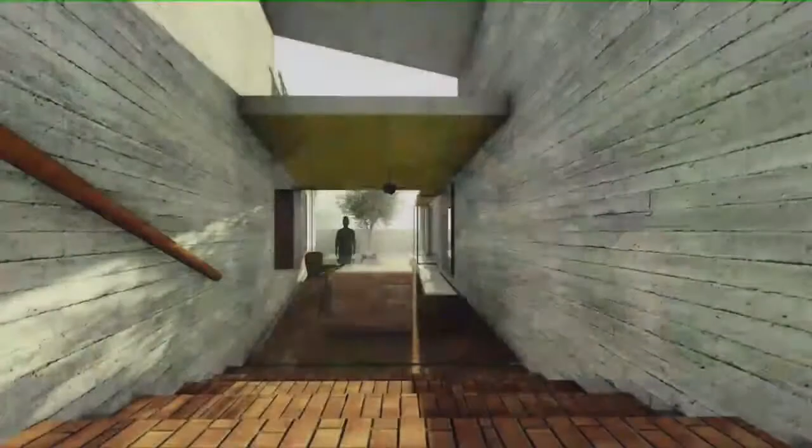So this is sort of what we do as well. So as a practice, it's a set of 20 people who are extremely passionate, deeply mad about what we do. And over the last 10 years of our practice, we've been fortunate enough to work on multiple things, juggle a lot of things, and ultimately find a way to put these all together in a way which starts looking like it's pretty balanced. But the kind of journey that goes behind it is crazy, it's mad. A highly passionate set of people, fully into what we do.

I'm going to run you all through 4 projects that sort of talk about different perspectives, different contexts, different scales as well. Starting from the smallest project, and like we know, each project or each studio, each setting that you live in has a story. So four different stories, if I can put it together in that sense.

This was one of our smallest projects that we started off with a couple of years ago, where the client actually came down from Saudi and said he wanted to come back to Mangalore, which is in the coastal part of Karnataka, and had a lot of memory with his upbringing there, with the brick factories and the area where he lived in. So although he could afford a larger place, he was extremely keen that we look at a place which is very, very close to where he used to live.

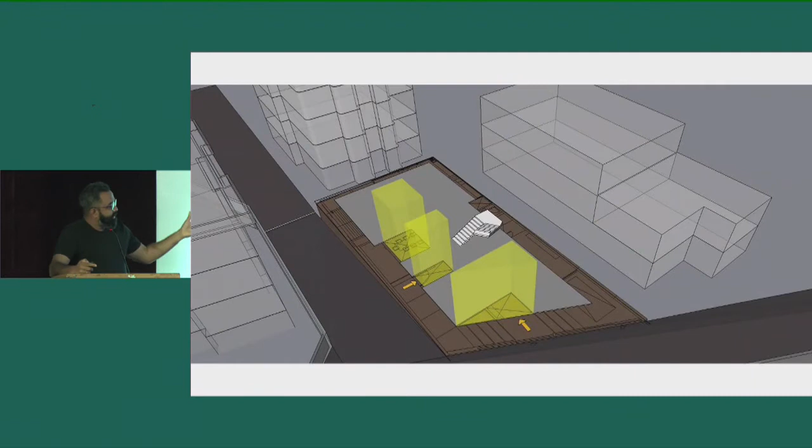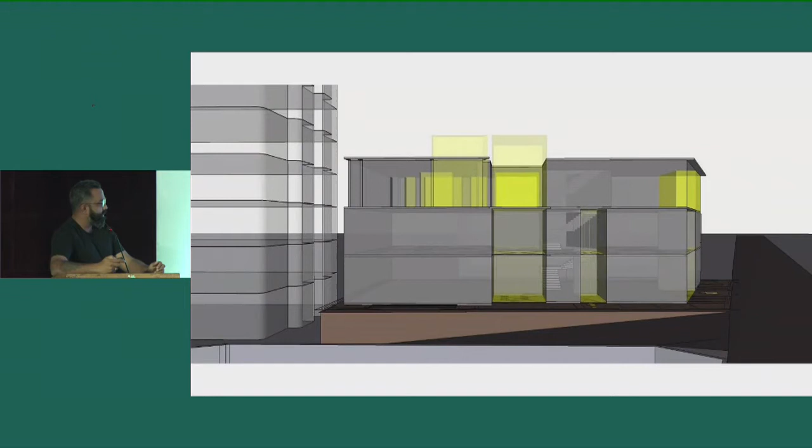So the entire setting was done in such a way that you had multiple things all around. So all that you could look at is find ways to open up to the sky and connect to the earth at different levels. So tight-knit site, concealed from all the sides except where you open only to the sky. The rest of the things that start coming together is this sort of a skin that comes out, which actually started building the story. So when you have a setting with multiple things happening around, and the only thing available is the outer side where you could look out, but then it also starts to appear that other people are looking inwards, then you start finding ways to tackle that. So that's where the whole idea of these bricks started coming in.

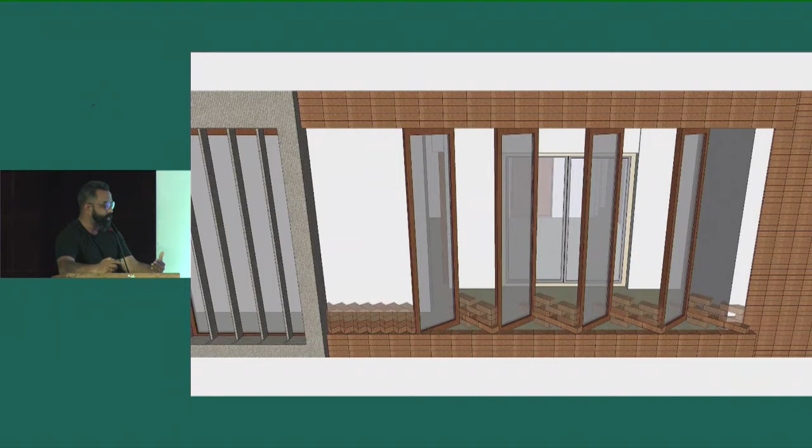So when you start looking at a process, we sort of build it through this initial foray of initial imagery that we start off with, which then started getting into detail, where every layer, every area started finding its own way, and every brick started telling its own story. So the kind of layering that was required for this project started finding its own way, and there were multiple hands collaborating together to find its own aspect onto the kind of direction and the kind of views that you would want to have, sometimes conceal, sometimes reveal, sometimes just work as a veil. So this was a project which actually allowed us to explore bricks in a 3-layered format.

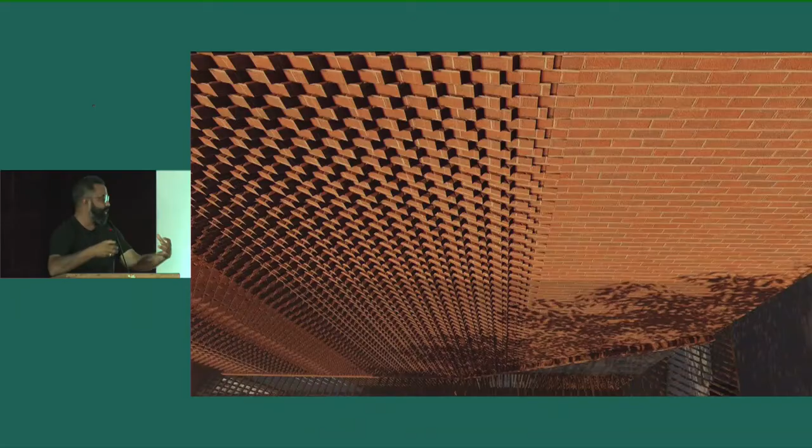Laterite being the first layer, which became the source of the whole structure. Then you had bricks on the outer periphery, which started working around the kind of layering that was required, and the inner brick started doing its own thing. So each brick actually started finding its own way, started having its own story. And this was the first set of workings that we did, running you all through a few of the images and the kind of connect that you would have with the sky.

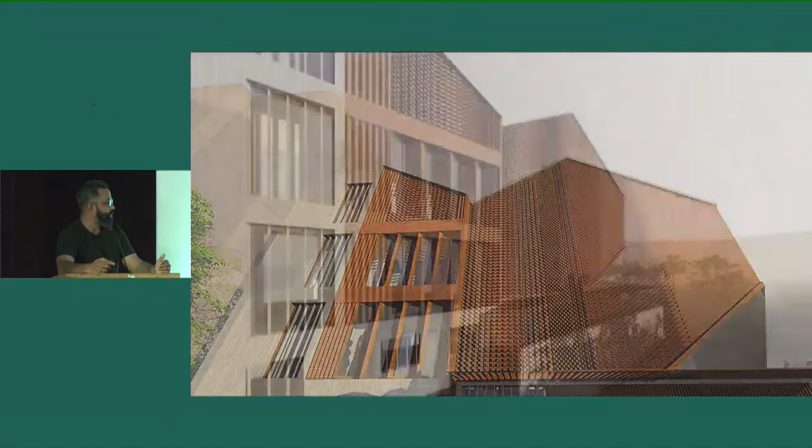The kind of layering also made it important for us to understand the kind of lifestyle that the client had. So the client would actually come down to Mangalore twice a year, thrice a year. So other times of the year, the house had to sort of conceal itself. So this whole idea of the bricks starting to play around had to sort of address those two issues where you don't know whether the client is at home or not. So that kind of a situation.

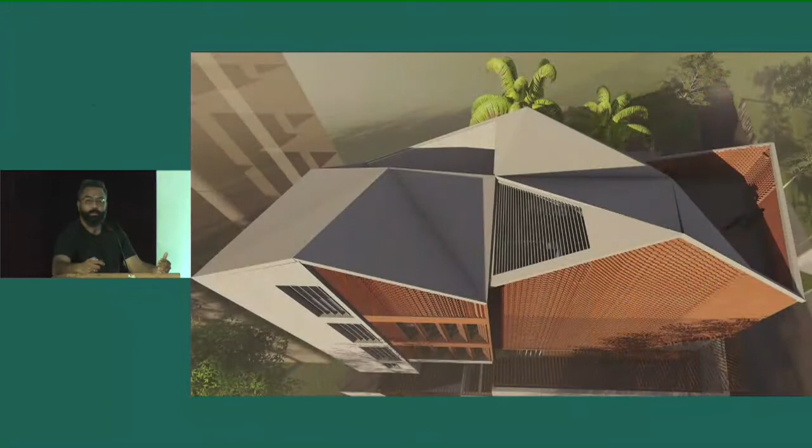So when you start looking at the way the brick started forming its own patterns and its own typologies, we started finding multiple ways to put these together. One of the things that we do as a part of our process is hand modeling, which has been around in our studio from the day we started, and a lot of the explorations happen on this scale, although I think we know who's here, who's explored brick and other materials to its finest potential. For us, being in Bangalore, we have our limitations with resources in a way where you can't do mock-ups, etc., being in another city, etc.

So everything that we do is hand-modeled in the studio, multiple people working on it, lesser time, too much pressure, but we don't give up on this. So this was one of the times when I think we put in 15-20 days of massive man hours to sort of put together every single layer of the brick and sort of start finding ways to build it, and also start finding ways to foresee any problems that you would have.

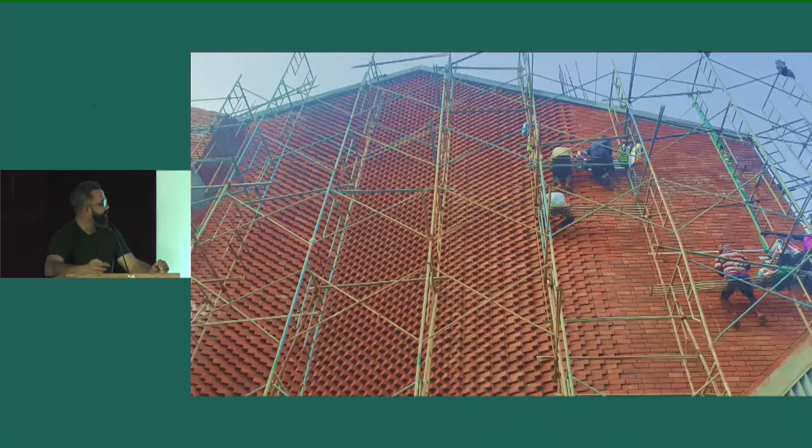Then it went on to the next level where we started rendering them to sort of understand the kind of feel that would come out of it. And all that you see was all done in first cut, and this is how we actually present to the clients as well. So what you see is exactly what we put across to the client, and then the whole experimentation started happening on site. The entire project in fact doesn't have any paint inside out. Everything was done in brick, plastered finishes, concrete textures, and whatnot.

The scale, although was not very large, but the kind of expertise that was required was also sort of worked out with the local guys there. We didn't have a special team that would come down from somewhere else. So those guys had to be trained. We had to work with them inside out to understand the kind of layering that each brick had to go through. Each brick actually started looking into different directions. Everything was done in multiple ways to sort of understand how it would react. So that's the first project where the layerings were done in multiple variations, from modeling to computer modeling to hand model to site, etc.

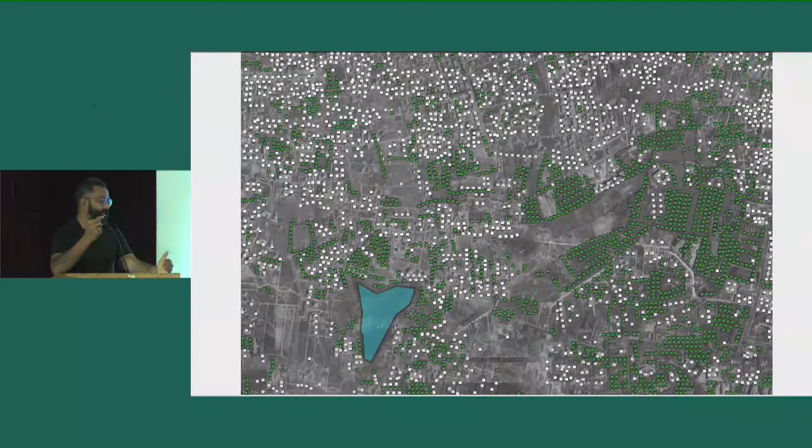The next project is something that's actually close to my heart. Vanam was a sort of a builder-driven project. In Bangalore, when we are doing multiple projects, you sort of stray away from projects where it is developer-driven or builder-driven for multiple reasons. But we realized that the kind of potential that the city has would start losing its charm if you start looking at only projects that you really want to do and start shying away from these projects which are sort of not something that you would want to get into on a regular basis.

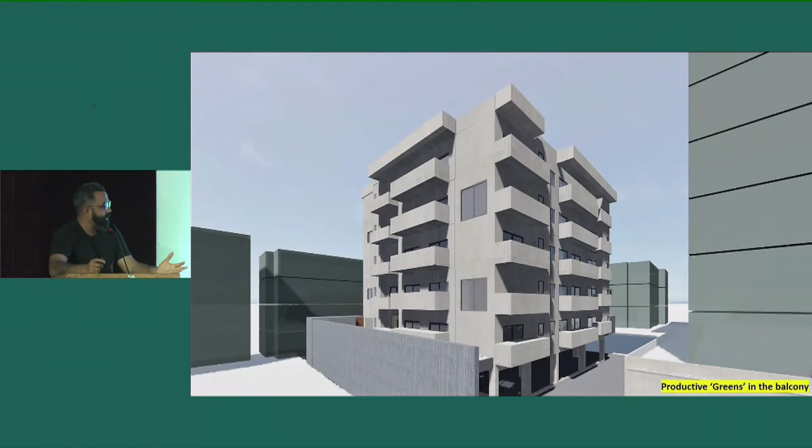The kind of context that this project had also allowed us to see how much of the greens had actually reduced, and the reduction in the size of the lake is also quite evident in the last 10-15 years. So we took this up as a challenge and said, what happens if we start looking at the small housing which is for only 20 units and see if there can be more greens grown as a part of the built form rather than just the building being built and the greens on the outer periphery. Because most of the projects that you get in Bangalore are actually quite tight in terms of the smaller context. Larger context, of course, you have a lot of green space that you could play with.

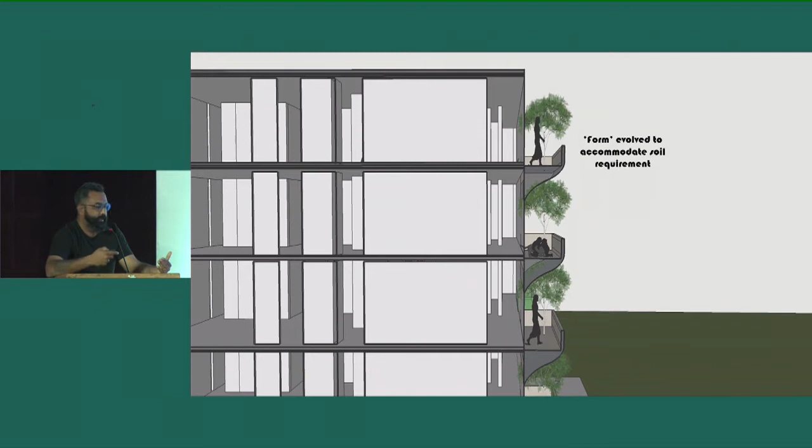So the process involved in this was to understand how the greens can become a part of the built form itself. So instead of looking at normal balconies that would allow you to move out, we said, why don't we start staggering it and start finding ways for the soil to become a part of it, so that the greens become a part of the built form itself, and then it starts forming its own layers. So that's how the whole form started evolving out of it, which eventually also found ways to find productive greens that can become a part of it.

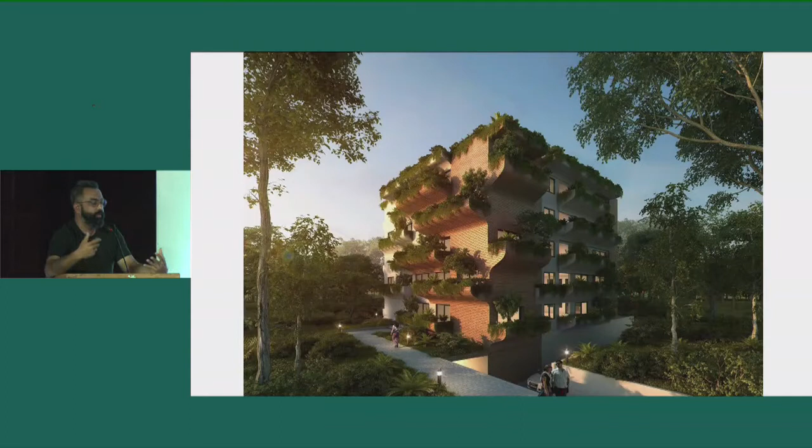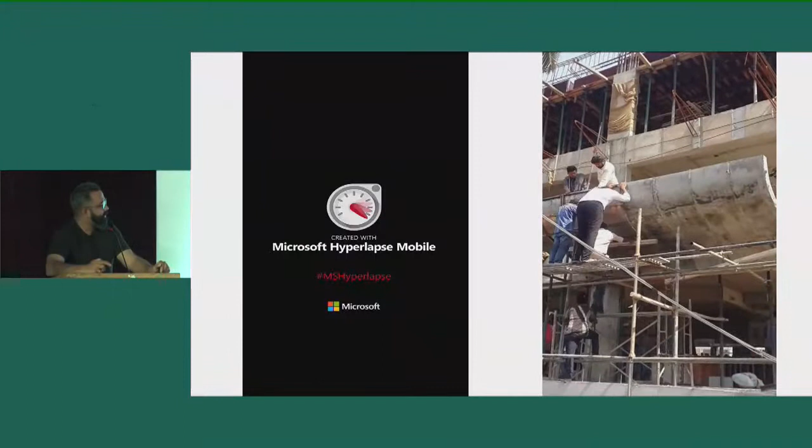We also did a lot of calculations to understand the kind of greens that every family would require and allow people with similar mindsets to come down and be a part of it. It was also an experiment on multiple levels. One was with the extreme tight budget and the contractors who probably never explored different possibilities or variations to see how they would react to it with the very limited budget that we had. A simple problem of even reusing the material had to be thought of, which we used in another project.

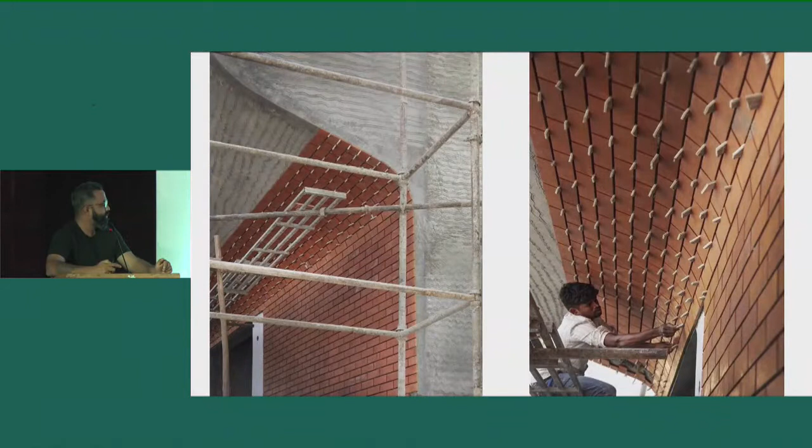With the tight constraints, it was also understandable that the time limitations were also there. With those sort of ideas, to find the right set of people and to start coming together as a community was more important for us. These were during the construction phase. Again, a lot of explorations done with low-cost materials that would actually allow the builder or the developer to not cut corners anywhere.

This building was completed about a year and a half back, and for us it became a very important aspect to see how people react and how people maintain, because it's important for people to understand that when you say you want greens inside your house or as a part of the community that you live in, you should be willing to give back and do whatever is required. So we've been tracking it for a period of 1.5 years to see how the whole space is reacting, and are all the greens actually there. Because beyond a point, it's difficult for the developer or the whole community to come together and maintain it.

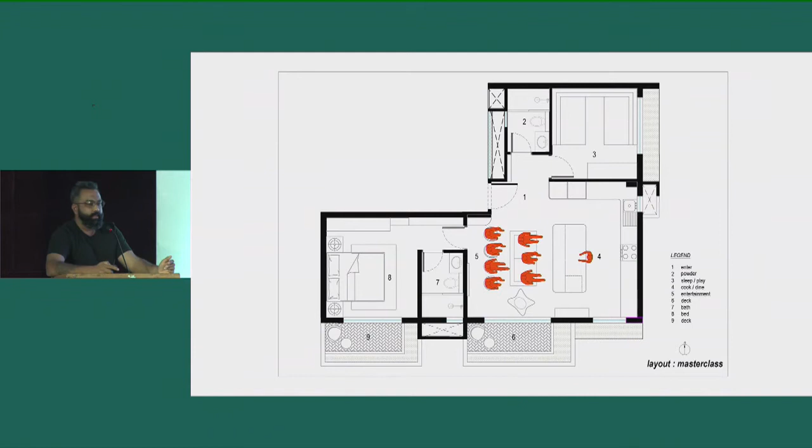And also the kind of planning that we did was so open-ended that it allowed people to use it for multiple things inside. One of the units which we designed and opened ourselves up to was this one which we called Shunyo, which is part of the same project. A few learnings from that project was that we realized when people say they want green and they get it, they are not really compelled to do that little extra effort. So we've realized over time of things that can be put across to people who really, really want to do it, and it is possible to do that.

And if every project can start looking at greens to be a part of their built forms, there are multiple ways to check the way the land use is being read. So that was an experiment for us, and now as a practice we are doing multiple projects where green is becoming a stronger part of the built forms, and we are not afraid to do projects that are commercially driven or developer driven and yet find our own way within it.

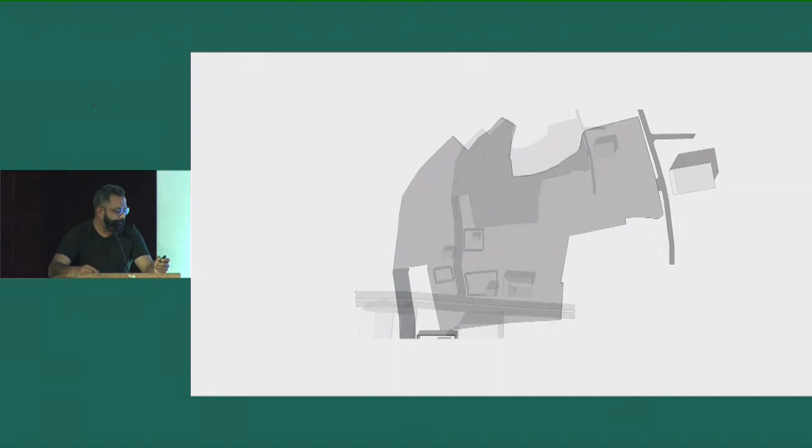This third typology is basically a project that came to us, in fact, again in Mangalore, surprisingly, where the client was extremely keen to have a community driven project, but at the same time find ways to get revenue out of it. It was a 5.5 acre property on the Mangalore-Surathkal highway, where the requirement of a community center was planned with a set of convention halls and places where you could have banquets and things like that to help drive the economics for that particular zone. It was a pretty large parcel of land where you had requirements for a 3,000 capacity unit.

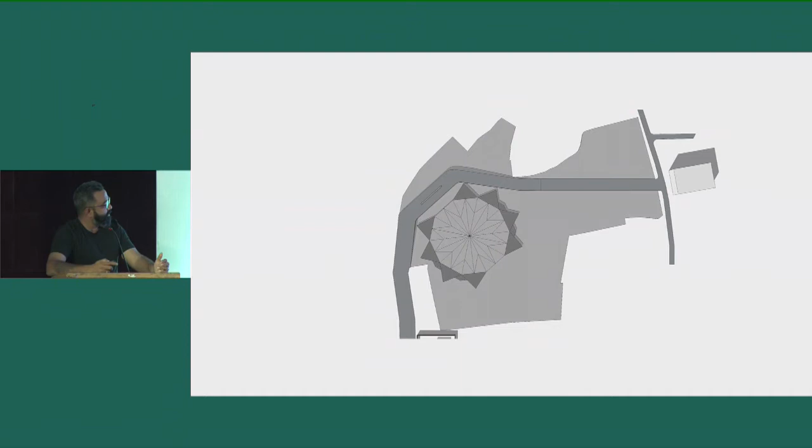What started off was with the idea of coming together of a couple of convention areas. Started with the whole concept of looking at an 8-pointed star or an octagonal form that evolved from our initial workings of symbolism and a lot of other layerings that I'm not showing here. The entire process then culminated onto layering in 2 different parcels, where the lower part was being used for banqueting and food, etc., and the upper levels is where you start walking up to the main convention zones.

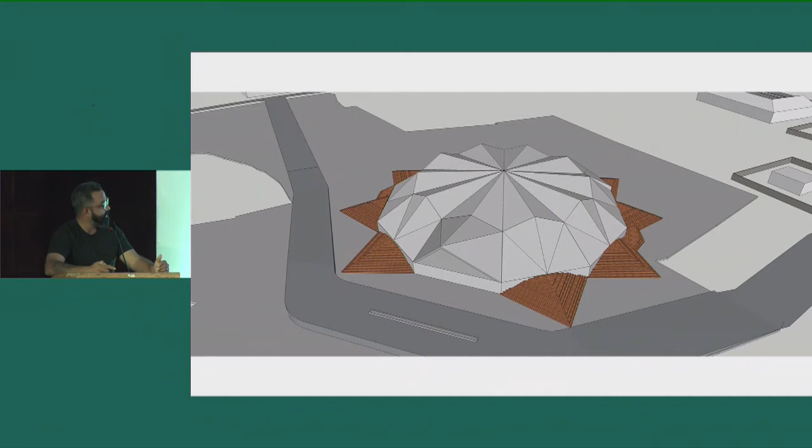A lot of the explorations for us happened in this project through the materiality, because although larger in size, we had to find our own way to look at materials that are still perforated, something that allows the light to fall through, and something that allows you to connect to the outside, which is typically not possible in events like these where everything is covered and closed.

The material play was actually quite simple, with laterite forming the base, and it starts getting lighter on the top. So you've got a combination of steel, bamboo, tensile and the laterite coming together. The material play, which started off with the initial working, started getting more and more complex once we started detailing them.

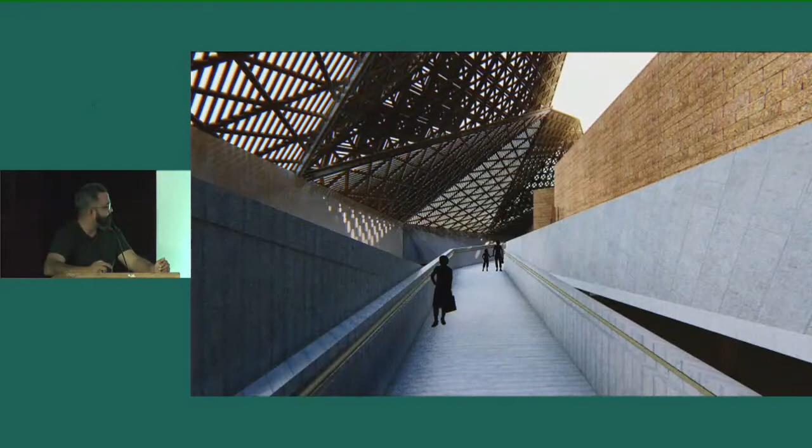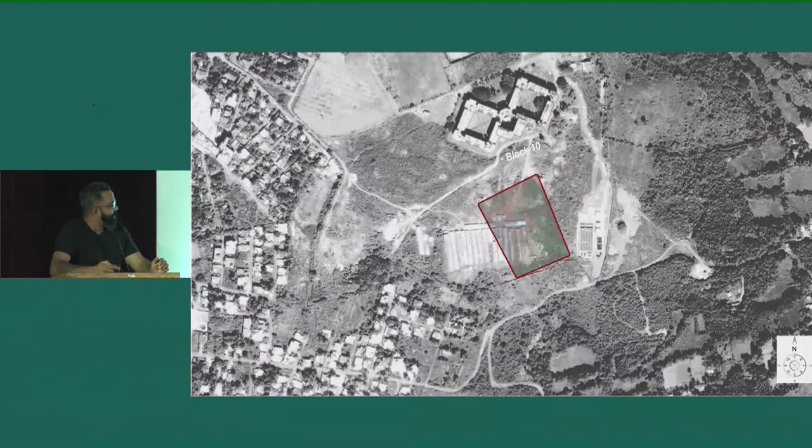And this was a project that we won a year and a half, 2 years back. It was a competition project for the School of Architecture in Manipal. I would take a little more time on this, and that's why the previous projects were driven a little fast. This was the site, and it was a fantastic site to even get an opportunity to work on.

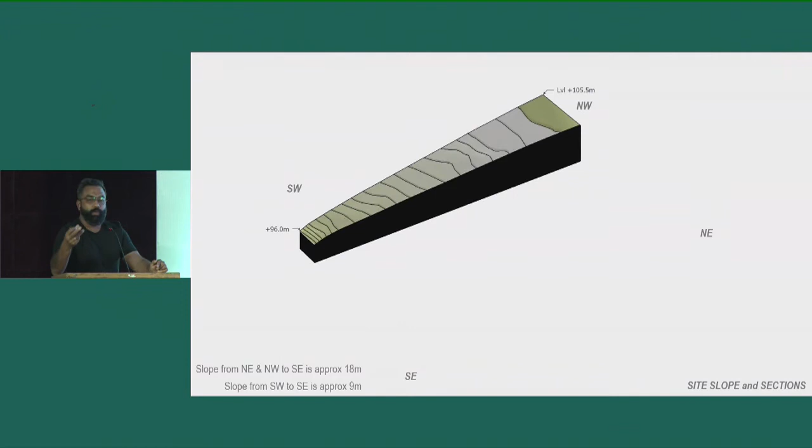There was a dip of about 18 meters from the topmost to the lowermost site, which also meant that the kind of layering that had to happen had to be so strong and important that it would not defeat the land use. If the building was not built, it should have the same sort of effect when the building is built, because the whole wind direction, the daily movement of wind and even the rainfall or the water had to be addressed. So that became the first set of workings for us to understand how to react to this project.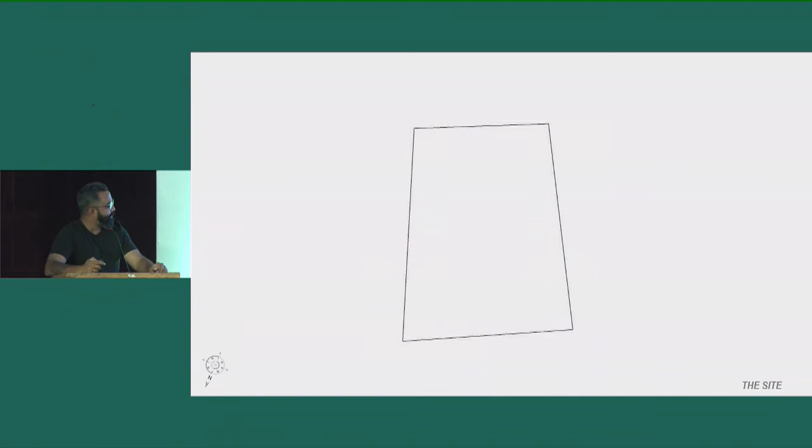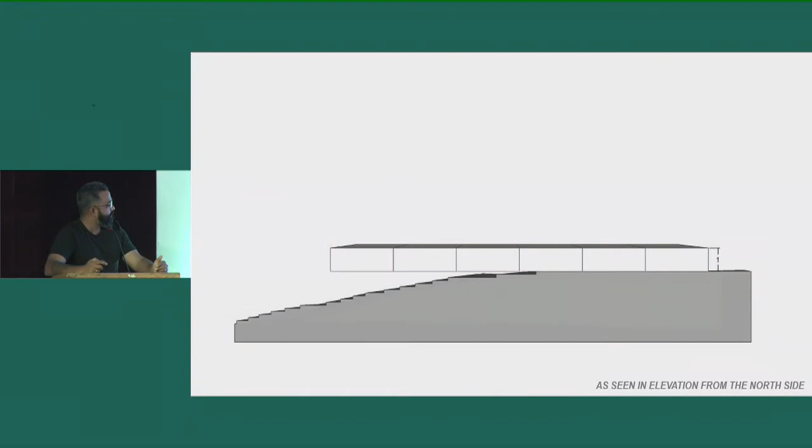The process started off with understanding the slope first, then the whole story comes together. Because of the valley effect, the moment you see it from the other side, you realize that you don't want to overbuild and overpower the other side. So the whole stepped formations became very important, and then what do you do when you get these step formations and how do you connect the classrooms to that became a story in itself.

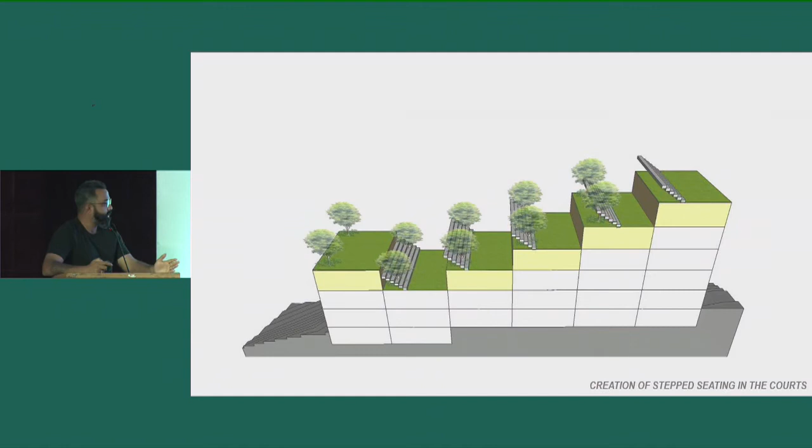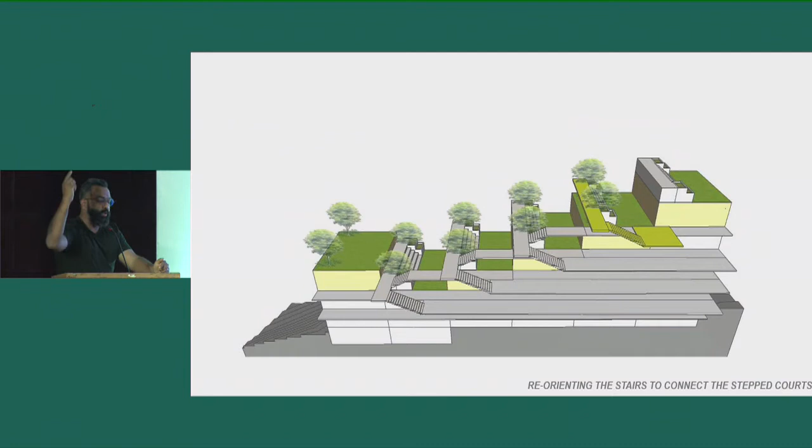So the idea was to give each studio the possibility of being able to open out and then have access to all these studios through a singly loaded open walkway rather than a corridor, and also allow people to go directly into the stepped court rather than going through the classroom or the studio itself. So the journey of being able to walk through multiple classrooms, if yours is on the topmost layer, you would actually know what is happening in all the studios as well, was the first idea that we started off with.

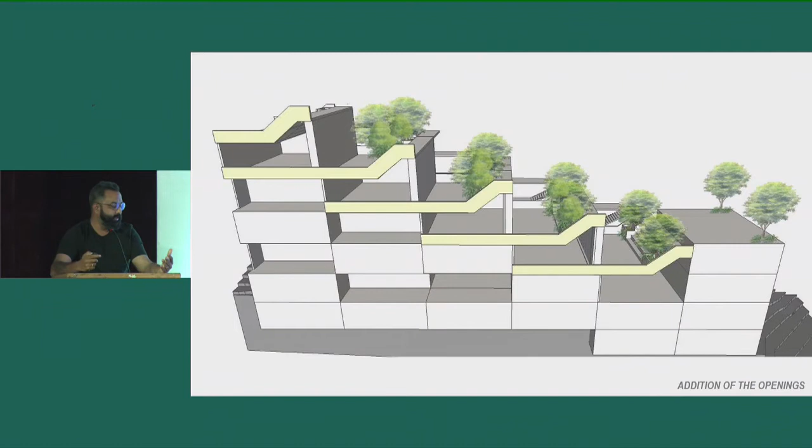Then the next set of working was to find additional interaction spaces or breakout spaces for studios that didn't have that stepped classroom. That's how this came together. Then the working that you see from the other side of the valley: the extreme weather conditions in Manipal are so strong that you either have too much rain or too much sun. So the entire working that you see now is reacting to that with a lot of vertical fins to cut down on the heat gain, and these light shelves which allow light to come in.

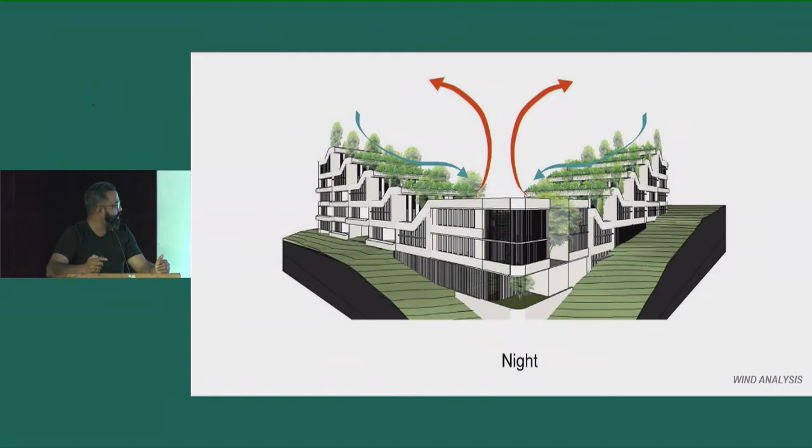And this is how the area of the stepped court started coming together. The same thing happens on the other side, with it reacting to the winds in a different direction again. The stepped courts become a very important part of the whole campus, and also made sure that the wind direction is still maintained. So this was an extremely important factor for us to stick to from the beginning till the end. Then the rest of the things came together.

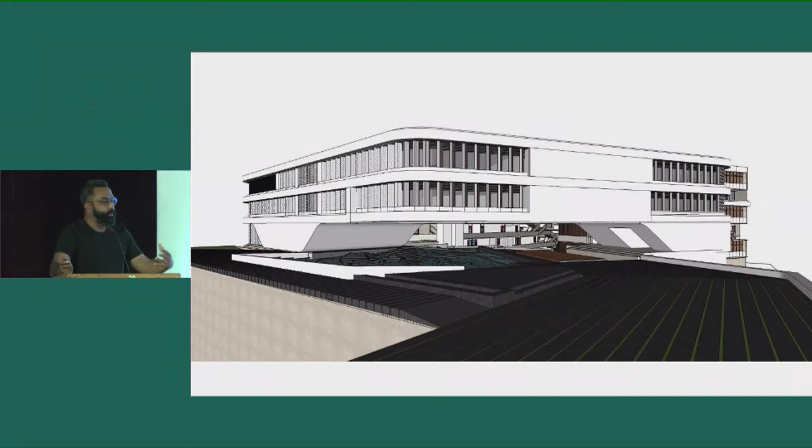It was a pretty long process. I think we had about 600 slides when we put them together for the first presentation. But everything had to find its own meaning, including the sort of entry that you get into the whole campus. This is the first thing that you see when you enter the district of Udupi, which is the main entrance gateway and the Krishna temple there.

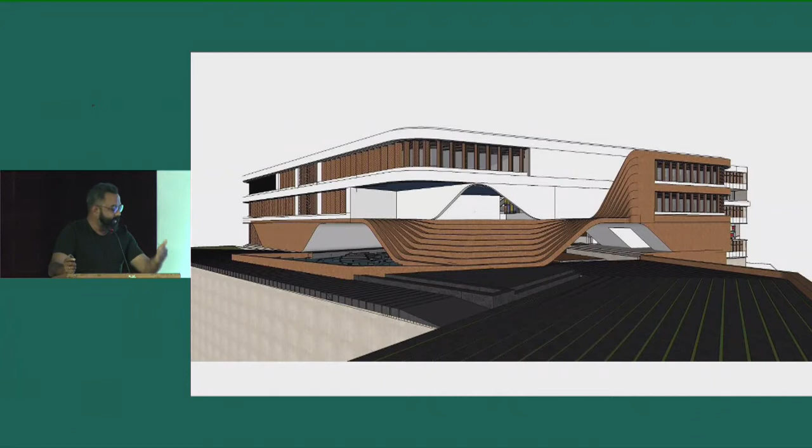A couple of things that we started finding meaning was when we started abstracting the kind of openings there, started finding ways to connect that to the place here, because 80% of the people who study in Manipal are NRIs, or people who haven't had a clue of the culture of the city itself. So that's how that thing started coming in, and the rest of the things started falling in place with the kind of details that we started working on.

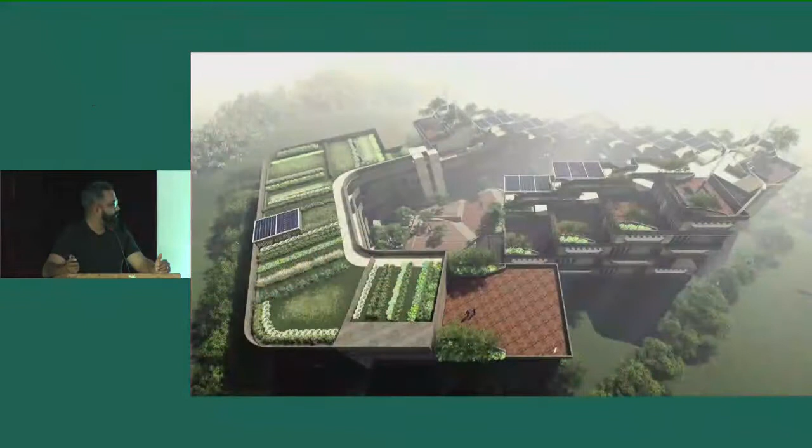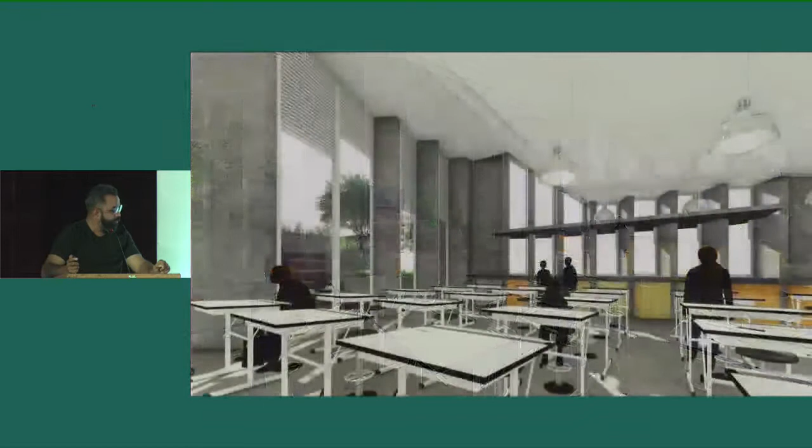So the idea was also to make sure that it's a 6-storied building, but what you see in the front is just a 3-storied building, and then it slowly starts opening out when you walk in. And that's the extreme end, which is part of the valley. The step courts. The studios that actually open out on 2 sides in most of the cases.

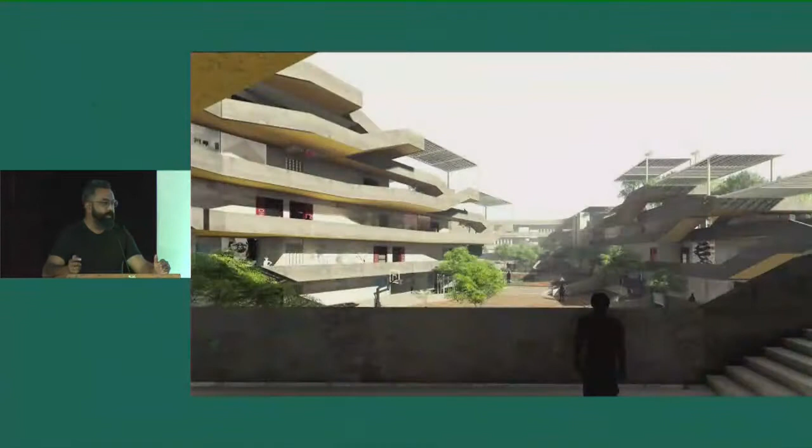And this was actually a very large project, considering you don't need such large spaces for architecture schools, but the requirement was for 1,400 students, 1.5 lakh square feet of built up, which also had interiors and fashion design as a part of it. So we had to find multiple ways for the central court also to become extremely active, because you either have fantastic views of the valley, or when you look in, you have the whole beautiful court which becomes extremely active on the inner side. The top terraces are also being planned for productive greens.

Contextually, the idea of not revealing the whole building was extremely important. That's why you just see the front 3 stories in the beginning, and then when you start walking down, you see the entire expanse of the campus.

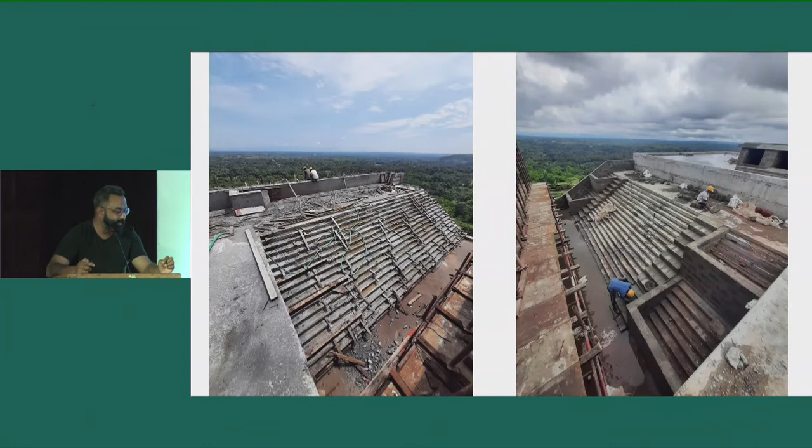And these are pictures that you see now, which is under construction. We have another year to finish the whole project. Massive steps, fantastic views of the valley for people who are working there. And this is where we've reached so far.

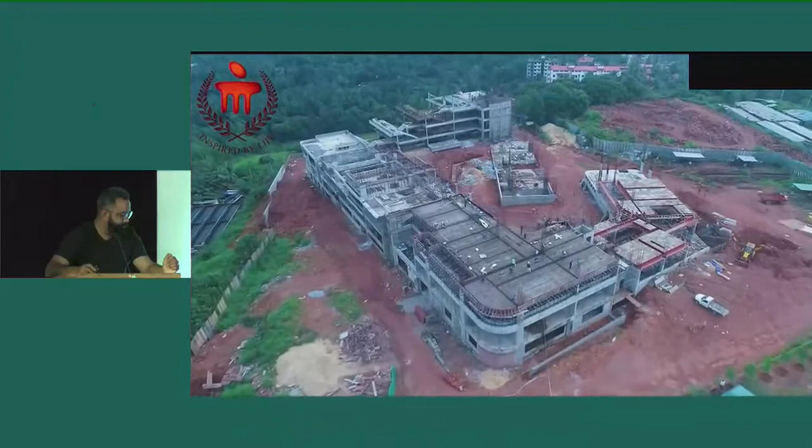And just to end this, I have to tell you that all these 4 projects that you saw were all done during the same time with just 8 people in the office. This was over a period of a year when there were about 25-30 projects that we were doing at one point of time. Slowly we've scaled up, we are about 25 now. And the kind of work that went into each project was massive, hand done in a lot of cases with models and things like that. And each context, each layering, each scale, typology was all extremely different.

So that's our story, and that's how we've looked at putting it across to all of you. I hope I've made some difference to you. Thank you so much.

Thank you, Architect Akshay Hiranchal. It was a very precise and enlightening presentation. I'm sure all of us in the hall could relate to his work and learned how to work in details. We'll have the question and answer round at the end of this session. I would now like to welcome our next guest speaker. We are extremely honored to welcome Architect Madhav Raman from Anagram Architects. Madhav is an architect and urbanist. He co-founded Anagram Architects in partnership with Vaibhav Dimri after they graduated from the School of Planning and Architecture, Delhi in 2001, formally established in 2004.

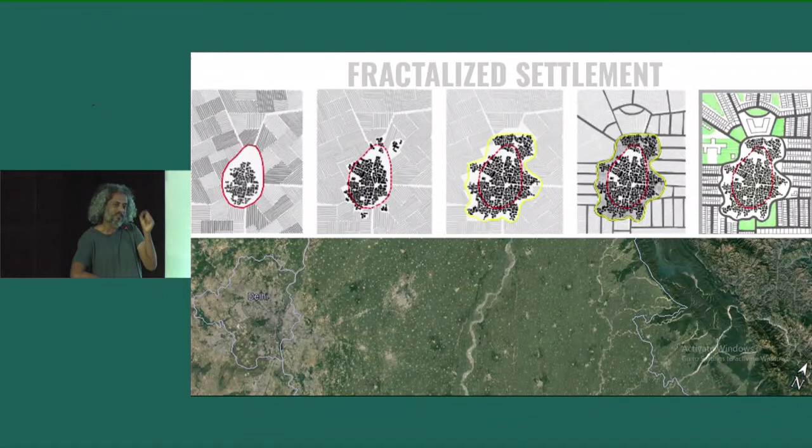So 25 to 30% of all Indian cities are formal. They have a master plan, they have piped sewage, they have piped electricity, piped water, and they look like this. But 70 to 75% of our cities, next, actually look like this. These are both photos of a place in Delhi called Dwarka. It was taken while landing in Delhi. They both exist at the same time, and this is what I meant by fractalized settlements. It's not that these are sharply divided communities, they're all intermixed with each other, and that's the context of architecture today. Next, please.

So I stopped driving about 4 years back, 5 years back. I only cycle. And one of the things that you'll see me walk around with is a mask that I didn't buy for COVID. I bought it 4 years back for the pollution. And that's because this entire belt from Punjab to Bengal, now after the monsoons, is going to become a smoke bomb. And that's the air that we all build in, that's the air we all live in, and that's what we have to consider as our context.

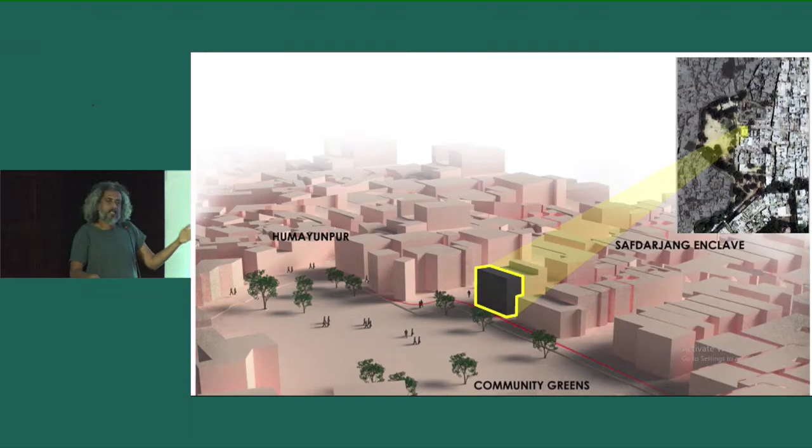They always have arguments with the colony about parking and who should put their vending cart where. The police have the run of the place because they pick up money from both sides. And this is basically the context that we had. It was at the very corner of this border.

So our first idea was to think about how you could create some level of empathy through movement. So if you could align your staircase in a direction in which each time you climb the stairs, each time you're outside a room, you are parallel to the movement on the street. That increases the idea of eye contact. So this was one of the factors.

The second factor was this was also the southwest side. So this building needed to be protected, as it's true with all early projects. Most of you young architects will know, clients don't have budgets, and you need to think of ways of reducing their air conditioning costs, lighting costs, so on and so forth.

So eventually we got into this. We were fresh out of college. We said, okay, we'll make a brick wall, and this will be the spectacular brick wall. And SketchUp had just come out with its first version. So we made course-by-course drawings and then made SketchUp models, and then we went to site, and we realized we'd never in our 5 years actually learned how a brick wall was built. That it's impossible to build a wall like this in the way we imagined it would be built.

So it actually took a very, very humbling set of lessons from the masons on site. And this is something we realized for the first time, that you can't build architecture until you're specifying in a way in which the people who are going to build your buildings are going to be able to build it. So it doesn't matter whether you have to make drawings, videos, do a theatrical production in front of them.

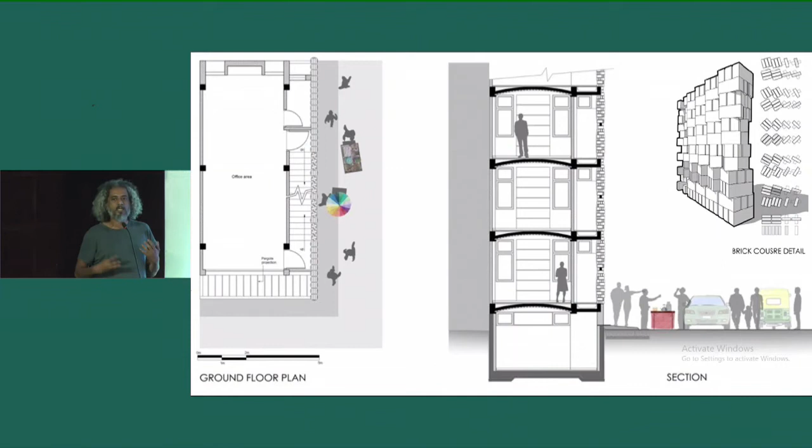It doesn't matter. The idea is, as architects, we are communicators of specifications, and those specifications have to be executable on the ground in a sensible way. And that is our first big lesson that we really learned through practice.

I don't want to show you too much of this because I think many speakers have much better versions of this brick jali, but the only excuse I can ask for is this is before we really had 3D SketchUp software to play around with. But essentially the idea also that brick walls are not made so much by putting bricks together, but also thinking about what it means to remove bricks.

Very often we think of ideas of building as constructing, of putting together material, of creating spaces by assembling things. But very often material actually demands that you start imagining ways of removing material from a structure. So these are various views of SAHRDC. Light, shadow, the protection against the sun, the idea that a texture can somehow convey empathy.

So if you look at every other house, sorry, which is the pointer here, the big button in the middle?

Yeah, okay, got it. So if you look at that side, most houses had windows facing this green, windows facing the southwest side, but they were always shut. They in fact had black tape on it. Windows are expensive. So what's the point of building windows if you're not going to open them?

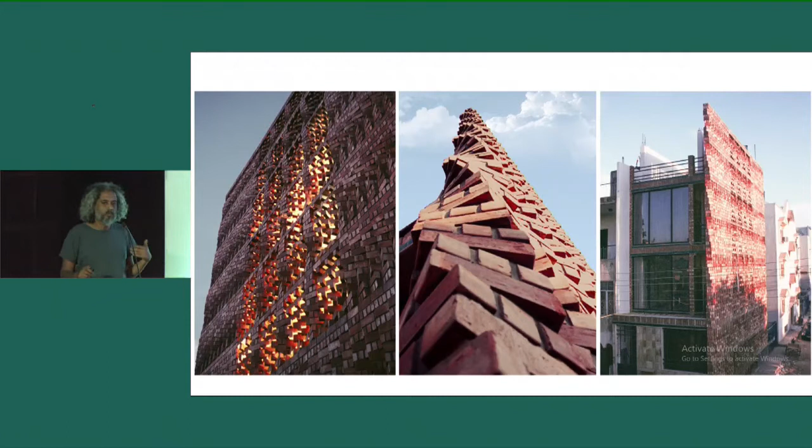So I'll just move to the next project. Yeah, so this is much more recent, about a couple of years back, and this is the second thing to rethink: this idea of privacy and families, where we live.

So this is a home that's built in a northwest corner of Delhi. It's at the edge of an industrial area next to a highway. The road in front takes in a lot of truck traffic that goes up and down. It's not very pleasant.

But when we build these houses on plots in the city, there's always this idea that there's a front facade, and somehow that front facade has always got windows in it. And then as architects, we spend a lot of time designing those volumes and windows and voids and textures and patterns, what we all call facade development.

But actually the idea is we have a very nuanced approach to what privacy means within the family. And this varies from culture to culture, but it also doesn't necessarily fit into the normal BHK arrangement that we imagine apartments have. So this was a family, a relatively young man who, through dint of hard work, set up a factory in the industrial estate nearby.

He was doing fairly well for himself, had a mother, 2 children, so it's a 3-generational family. But he could have lived anywhere in South Delhi and bought himself a luxury car and driven to the factory every day, 1 hour, 1.5 hours, watching something on his iPad. I mean, like all factory owners do, I expect.

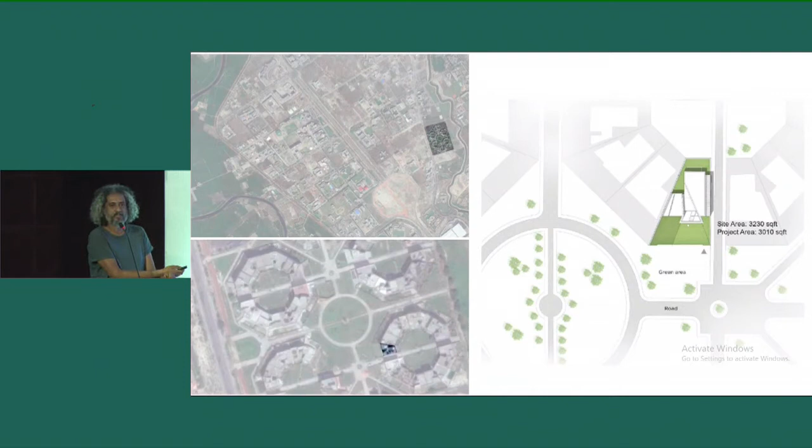So she is of the very firm belief that art is actually in the making of the art, not in the viewing of it, and that the viewing of art should be as democratically accessible as possible, that it should not be locked into museums. That's her fundamental belief. In a later project, I'll tell you, she was the curator of the Kochi Biennale, and her basic curatorial theme was also to be able to open up art to the people.

So we started with this idea: why does a building close itself? And what if a building was to open itself up? Why must openings in the building only operate in plan? Why don't they operate in section? Why don't we have a vertical unfurling of a building rather than a horizontal unfurling? And what are the possibilities of that? So it's the trapezoidal plot that made us think of squishing the building and then unrolling it, like the scroll you get when you sharpen a pencil.

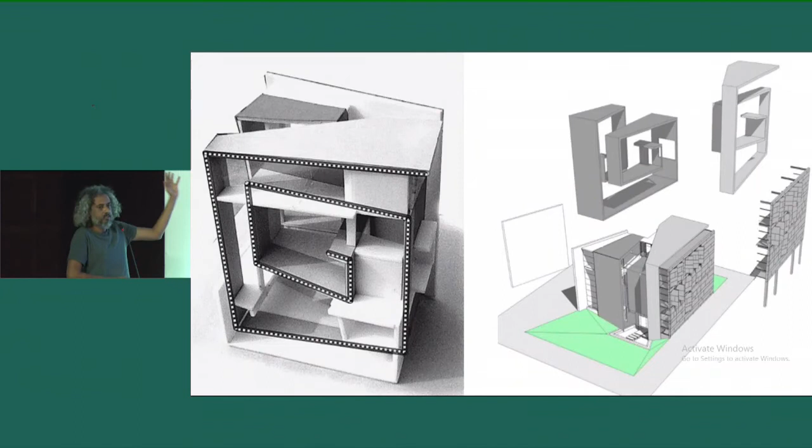So this idea was that there is a gray concrete loop, there is a ceramic loop, and they are supported by an armature of steel, which I'll get to the reasons for. This was also a way of negotiating the climatological context. So the front, the widest part, has the most amount of light, but also the most amount of heat. So that's where we stacked a lot of thermal mass, but we staggered them so that light could come in indirectly. One of the loops was in high contrast with the other, materially and through color, so that you get a lot of bounce light between the two surfaces.

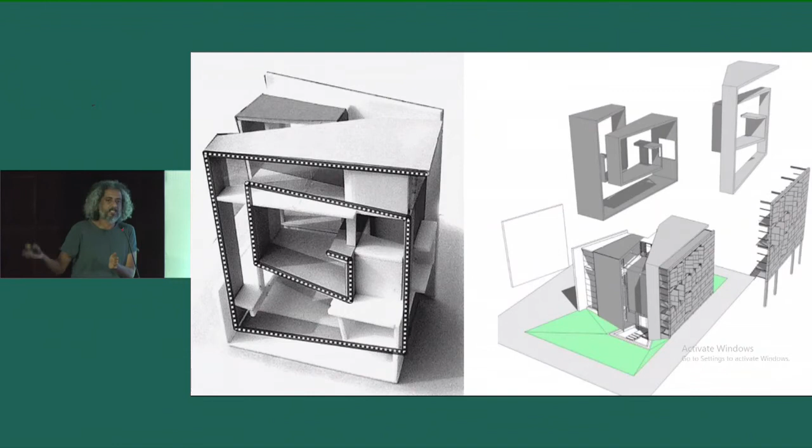Anita wants this to be her legacy building, so she wants it to host residencies after she finishes her time on this earth, or at least her time in this building. So it's a studio space, multi-level. Even within the studio, the idea is to be able to see art from different heights, different perspectives, from inside, from outside. And while you're an artist making art here, you're constantly aware of what's happening outside the building.

And that's Anita's idea: when I paint in the studio, I should be able to flip the painting outside and it should become a mural for the public. Equally, I want to organize a mural on the outside of my building, flip it so that it becomes museum art.

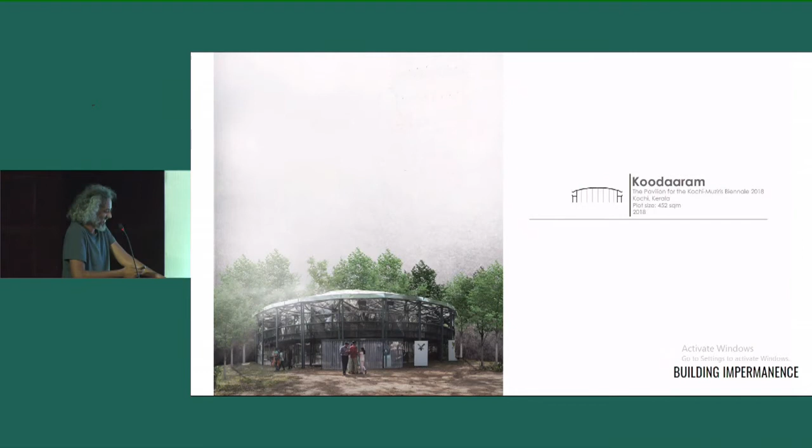So the idea was, and I have to say, this is also a lesson in building impermanence, but also working with incredible partners. So we had the great fun of working with Manjunath, who's a structural engineer out of Bangalore. We had great fun working with a very young furniture design studio in Delhi called Studio Wood. And we had great fun working with the builders and makers. There's Appu Thomas, Pali, the bamboo worker, and his team from Kerala.

All these guys, I have to say, worked at a time that was terrible for Kerala. This is just after the floods. In fact, a month before the pavilion had to be constructed, we didn't even know whether the Biennale was going to be on. That was the devastation. This site was flooded for 3 weeks before we could get access to it. So, in those contexts, I must say, this is also a pavilion that represents, to my mind, joint effort more than anything else.

So the idea was to build, Manjunath is great with steel, so you can have these very complicated discussions and WhatsApp sketches in the middle of the night to each other about what the structure should be like. And he actually works with architects in that manner, in a sort of doodling manner. So, to try and understand how trees work and how the tree structure system works. How do you marry something like steel and bamboo together?

Why do it? To do it in a way in which every piece of material that is put in here, you are able to dismantle and reuse and sell and buy, and therefore not just help with the construction cost, but also understand once you make a pole of steel, then that steel stays like that for 100 years. So you don't use steel if the pavilion is only going to be there for 3 months. Then after that, you have to think about what happens to the steel. Don't build in walls that have to then be buried in the ground and become archaeology.

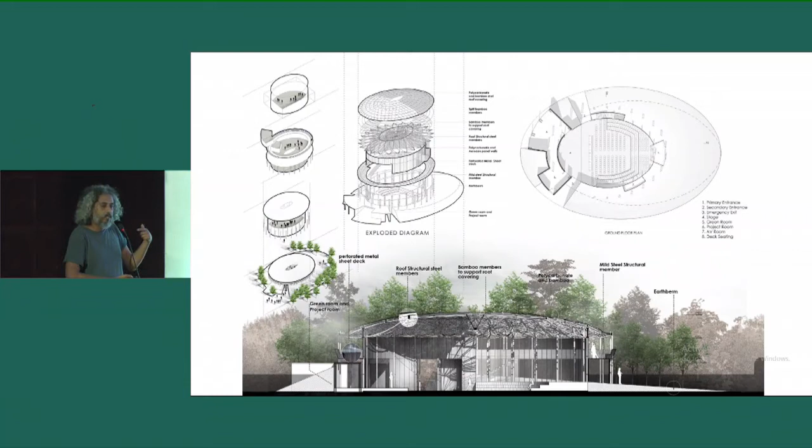So what if performances could happen with much less tension, where you could, if you wanted, talk on the phone and watch something? If you were outside enjoying the sea breeze, you could. If it was too hot and you wanted to go into the air-conditioned space, you could. So it's all about designing the circulation so that this can happen discreetly without creating disturbances to the performance.

So we also had a hip-hop cipher since you guys are youth.

So, okay, this is a project called Project Samman. This was a government project to build 120 community toilets in Bhubaneswar and Cuttack. The problem here is these were community toilets for places that are illegal on the map. And that has always been the problem with sanitation in this country. Thankfully, now there seems to be a lot more energy from the government in terms of building sanitation facilities as stopgaps. But please remember that everyone having access to their own toilet is almost like a fundamental right. That is one of the biggest divides we have in our society.

It's not like you provide public toilets and community toilets and the job is done. This is merely a stopgap. This is only so that there can be a way of including those people to a situation where they get a water connection and a sewage connection, or have some way of honorable defecation, to put a polite word to it. So this is a story of unequal water.

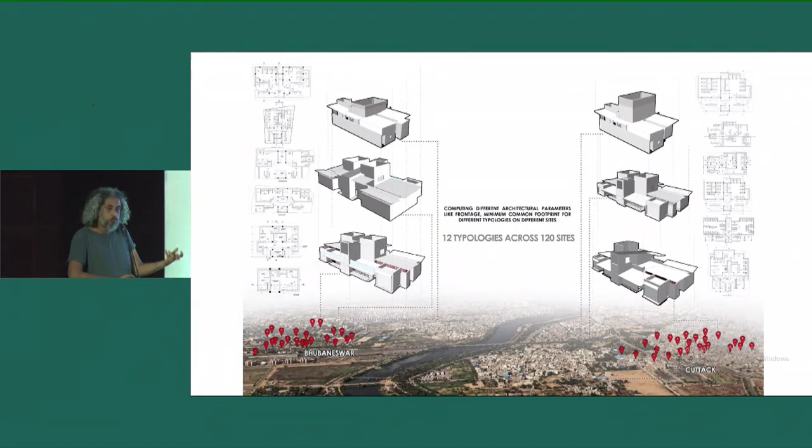Which includes sitting with the community, figuring out how they use toilets. For example, in Odisha, it's not about washing your hands after using the toilet, it's about washing your feet. So we had to design, it's in the next slide, a stand where you can wash both hands and feet, because one of the mandates of the program was to induce better hand washing behavior. So we had to do that by creating a design for places where people could wash their feet and hands at the same time.

How the billing happens. A lot of people feel they don't use toilets because they feel angry at the guys operating the toilets, because they don't see them doing anything other than collect money from them. So to be able to see the guys actually maintain the toilets while you're waiting in queue, so that you know that there's quality where you're putting in money. These are all transactions we in the upper middle class demand from our service providers, but we don't have the design avenues to provide them below a certain income group, and that's where architecture can make a difference.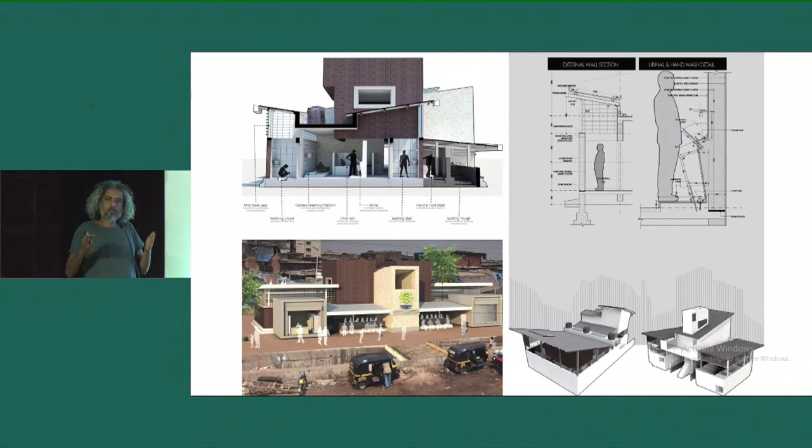We deployed systems of queuing up that are actually borrowed from how we queue up at airports to get boarding passes. It's no different. You line up and you wait for a turn where one door opens. Earlier toilets in Bhubaneswar, people would line up in front of individual stalls, get frustrated and break the door. So these are cycles that can be rethought and redesigned. To help people wash their hands after urinating, to design a hand washing system that goes with the urinal, and build that into specs that can be tendered.

The biggest challenge is this is not some private contractor building it. It has to be built to cost to government specifications. It took 6 months to write the specifications to this project. They told us it would get built in 2 years. It took 7 years to build 97 so far out of the 120 toilets. So even with all good intentions, the systems we have to rethink are so deeply embedded that even when everyone agrees a certain set of things are good ideas, it takes a lot of dedicated effort to push it through. Nothing that I have done. I finished my job after those 6 months, but it takes people in the municipal corporation, it takes people in the Housing and Urban Development Ministry, it takes people to drive this project through. And that's the result of that, 97 things.

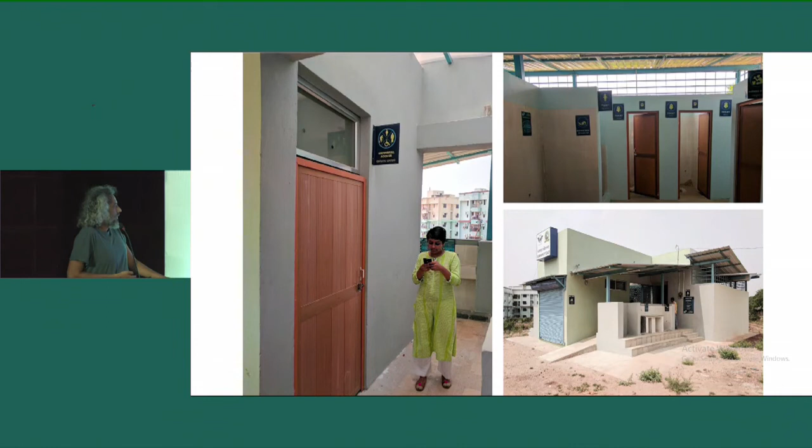I'll just end with this. I think this is my last. I hope it is. So Pakka is a collaborative that Anagram Architects is part of. You can find it online, pakka.in. We are trying to build base of the pyramid infrastructure in rural India using MPLADs, which are your MP Local Area Development Funds. There are certain caps to the project size. We don't attempt anything that goes beyond, say, 10 lakhs. These are to be able to build baseline infrastructure.

I'll just run you through a slideshow of what we did in Durgapur outside Bodh Gaya. So this is not really designed by Anagram Architects. The idea is to look for young people like you, people who are taking a break after their college education or doing internships, to spend 3 months in a place, be guided by specialists and experts on how to develop a quick piece of infrastructure, coordinate with the MP's development funds in order to be able to build it. And the idea is to get in and get out quickly, not to build a dependency, to transfer enough technology so that those guys don't have to call their MP again and say, this is broken or that has to be fixed. They're able to do it themselves.

Bodh Gaya is a tourist town, lots of plastic. This is the Mahadalit community in Durgapur outside Bodh Gaya. Many of them are rag pickers. So the idea was, could you build in masonry units made with compressed plastic? And those compressed plastic modules are actually made by an NGO in Bihar, but they don't have a place to use them. It's just a product innovation they've done.

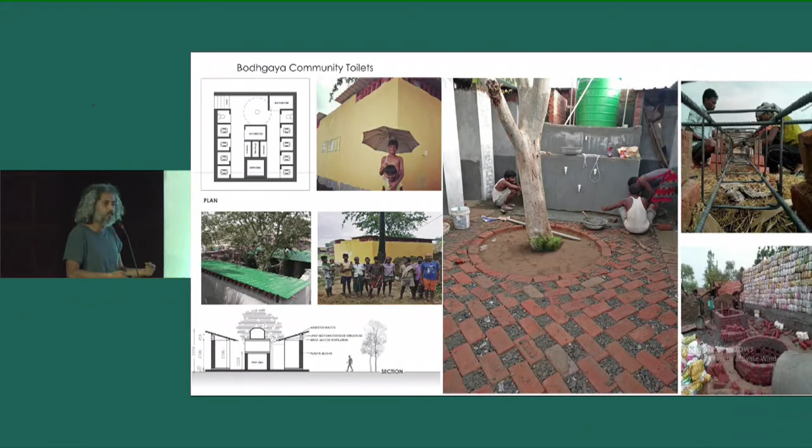And this happens when you work with local government, local MP. People have ideas. They tell you, can we build this in? Can we work with this? And it's possible to do baseline infrastructure like this in really short periods of time. And I mean, there's no reason why that has to happen on the flooring, but that happens because people themselves are proud of what they're building. So they will operate like designers on the ground.

Final project, I think this one, it's Earthmade Gymnasium, it's ongoing. Similarly, it's a project in a place called Malakpur. Malakpur is called the village of wrestlers in western UP, Baraut. And this idea of building know-how. So the youth in Malakpur, so Malakpur is located very close to Delhi, just beyond Delhi and Meerut.

The problem is, these youth from that village don't find avenues to their wrestling. So even though they're so close to Delhi, they all want to become part of the national team, international team, the wrestling federation, so on and so forth. But they don't have mats. That's the only reason why they don't make it. So 100 youth will go from this village to the city of Delhi to become part of an akhada, to get into the national stadium, to be able to wrestle on mats.

99 of them will come back broken-limbed, broken-hearted, broken-souled, and just one person may make it big. And that journey is extremely painful to the body and the mind. They resort to drugs in order to enhance their performances. After they fail, they're still hooked onto drugs. They like staying in the city because it's easy money as muscle for power. In a city like Delhi, you can imagine, their muscle on hire. They become bouncers and basically become the criminal underbelly of the city of Delhi.

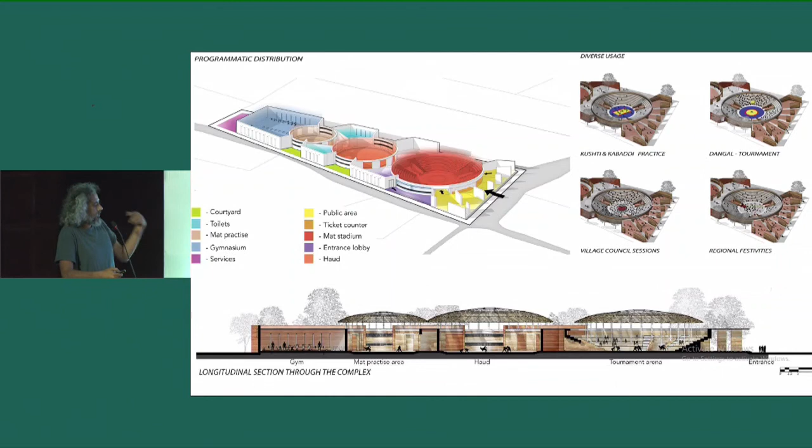So very simple structure made out of rammed earth, simple standalone walls, then covered with a roof structure that's actually derived from our Kochi structure. Little detailing so that becomes part of the rhythm of making the wall rather than treating it as a facade that is specific to a building. Provide ideas that can work in section, in detail section, in external wall section, and can plug in, and the person building it understands why this is being deployed there, and not just because it looks good.

So I'll just end with this. To my mind, there are 6 things for us to think about if we have to rethink architecture, and this is what I call the disaggregations of resilience. First is consider streets as sites. As architects, we very rarely consider roads and streets as sites. We don't even think our buildings contribute to the architecture of the street or the road. It's important to think of that. The second is to look at consumption as being scattered and therefore resource tapping, resource production as not being centralized. I like photovoltaics.

The fourth is multivocal. We all have concepts. We all say things through our designs. But can we make designs that allow other people to speak? Can that design mean something differently to them but have enough value? Even if that's not your value, if it's that person's value.